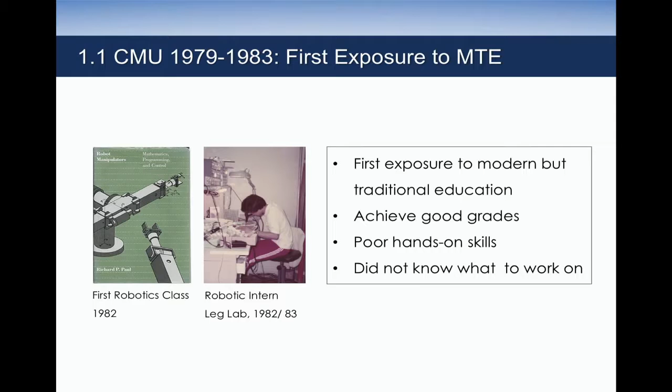Fortunately a year later I spent a summer intern at CMU with Mark Raibert on robots, which gave me a little bit of help. But overall, for my four years, I didn't find a problem that I really wanted to work on. That even dragged me for two years at Berkeley.

I first worked on geometric control with Shankar, and because of a seminar by Isidori and by Wonham, I learned some geometry, but still I didn't really have a feel for the problem. Other people do, but I don't.

Then Shankar wanted to start a robotics program here in Berkeley, so he asked me to help organize a graduate seminar in robotics. I invited a couple of people and got interested in multi-finger hands, because I have a pair of hands so I could see the complex relation of the hands and how to manipulate. Of course, having an experimental setup is very expensive at that time.

I had a fellow graduate student by the name Brad Paden. He said, if you don't have an experimental setup, perhaps you can prove it. So I learned that perhaps there's an alternative approach besides an experimental approach, just like theoretical physics versus experimental physics. So then I jumped into it, tried to learn the tool, and thanks to the richness of resources from Berkeley, outside the EECS department, there were so many additional tools available.

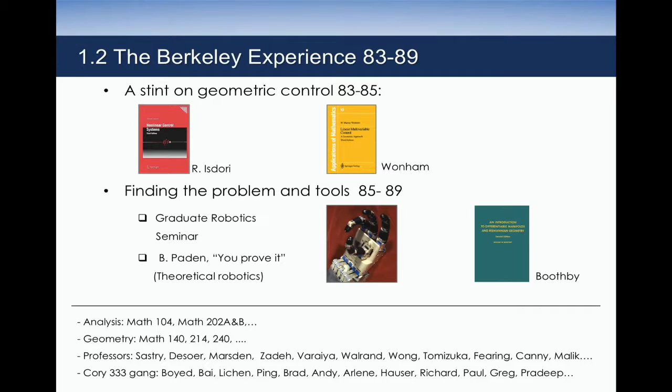I took lots of math courses. Those are probably students there - they will still recognize those numbers, right? And they also have wonderful graduate students there, and also wonderful professors. You can walk into their door and ask questions anytime, right? So I truly benefited from interactions with fellow students and with professors there.

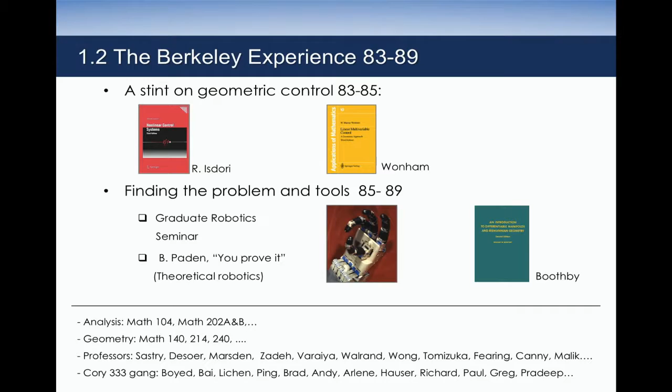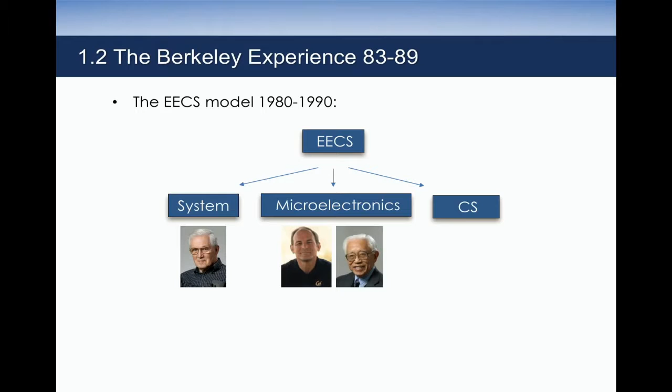I still remember, that was probably when Jing was the department head, right? That department was organized into three major parts. I remember CS, but the CS was still a small portion. The majority was systems and microelectronics, and those are professors that I know.

And of course systems and CS had a tremendous impact academically. But around that time it was really the age of microelectronics - they impacted both academia and industry. Also, lots of my fellow students from microelectronics, after their PhD, went on to found their own ventures - business that I call PhD-driven startups.

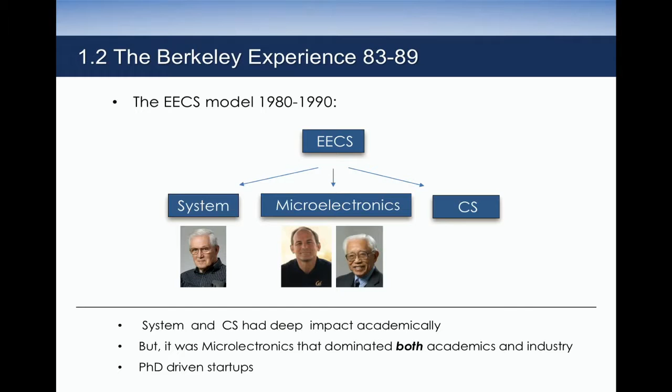I had a 2 to 3 year short stay at MIT Leg Lab, and Mark Raibert was my advisor, both at CMU and later at MIT. After many years of being a professor at MIT, he quit, and they founded Boston Dynamics.

And I asked him why, and he said as an engineer you really need to push from basic research, to applied research, to business - even though to this day he still did not sell a single robot. I talked to him, but he had no regret that he took it on, and the company we all know was bought by Google, and Google probably wants to get rid of him.

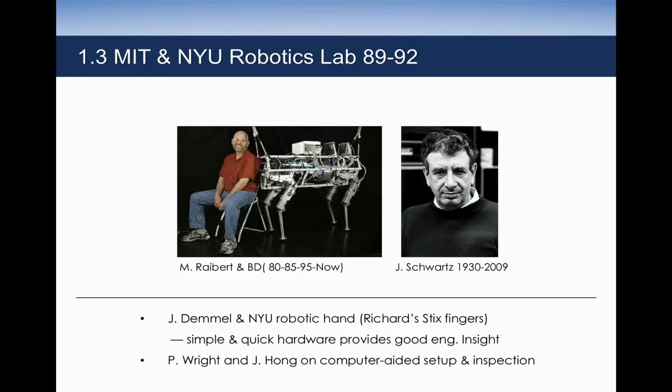And then of course Jack Schwartz used to be a mathematician, and I know from his heart he wants to do something real, so he established the robotics lab. I also had interactions with James Demmel, who went back to Berkeley, and also Paul Wright, and learned a few real problems on computer-aided inspection and also manufacturing.

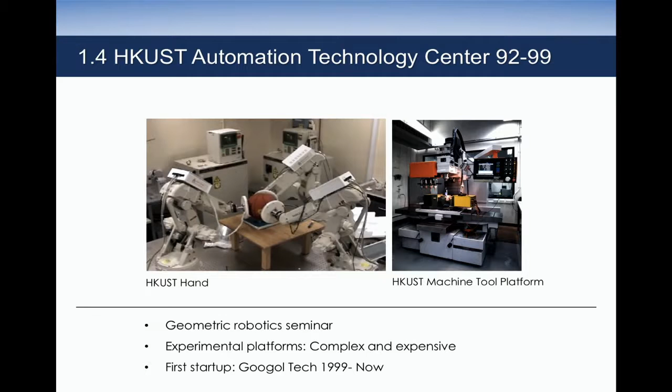For my later PhD students, I immediately asked them: you have to learn the math and also do the experiments, and use both approaches to try to solve the problem. After a couple of years, I believe I came to know how research and experiments work, until I finally utilized the controller I built for the hand for my first startup. So that is really the first part of my story.

So the second part - I thought I still want to recall a few of the important elements that I learned in Berkeley that benefited many of the things I do for a long time. That is geometric robotics.

I know that here the robotics program is getting much bigger and much more interesting, but I think the tools are still probably more or less important. For us, and for people from Berkeley, we benefit from the rich mathematical environment and theoretical approach. We use not just the traditional mathematical tools, the Euclidean geometry, right?

Those are the people who contribute to the development of these tools. Today we know if we have a space modeled by Euclidean space, then you can use calculus to analyze properties of your system on those spaces, because all engineering problems, through approximation or linearization, eventually become a function on Euclidean space - this we all know so well.

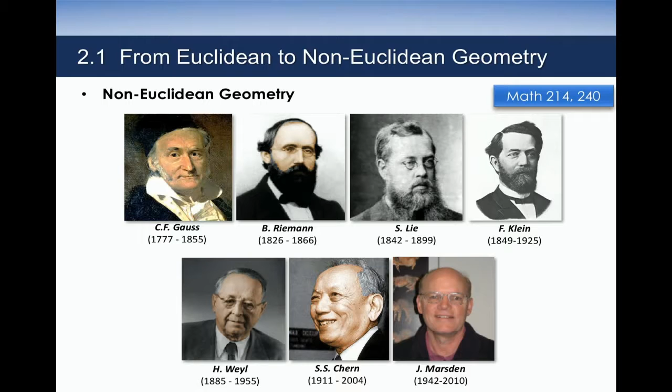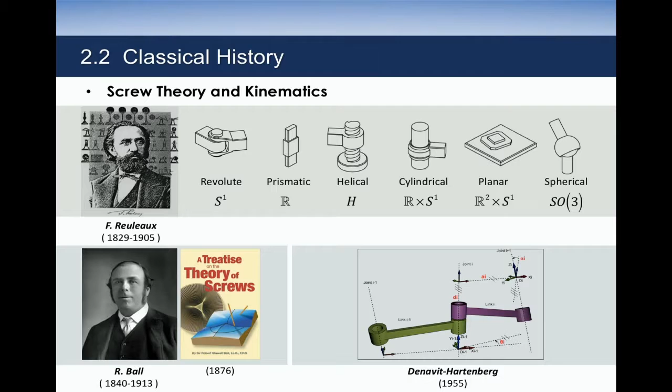And of course, the use of mathematical tools in the old days to analyze the mechanisms, analyze the problems of robotics. If you use the traditional mathematical tool, those are called screw theory, which I call the classical mathematics for robotics, and those are the developers.

For me, I'm so fortunate I was able to learn the modern tools. That was introduced in the early days by Roger Brockett from Harvard. Shankar brought me the PhD thesis by Montana, and also the group from the East Coast and the West Coast not only collaborate but also compete in a very friendly manner.

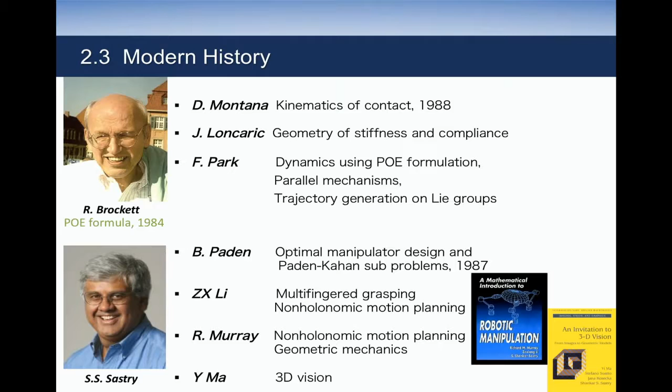Shankar and many of the students applied and developed the tools for robotics, for 3D vision, and for many other interesting things. I believe all those are covered in those courses, if you take EE 125, 192, and also you will see.

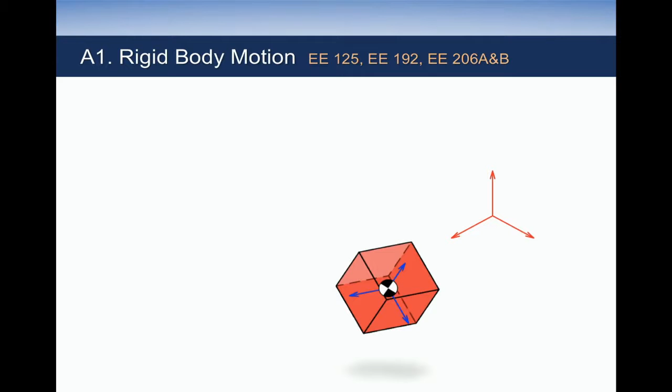It took me a long time to see those problems. I think the problems are really, really important. The tools come next to it, and now you also have AI, machine learning. But I think the problems are still the first order issue. So I'd like to quickly go through some of the problems where those tools are extremely useful.

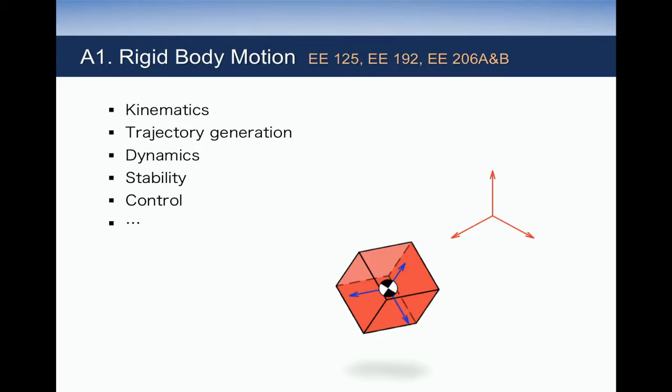For example, how do you describe rigid body motions? Using those mathematical tools, there's kinematics, trajectory. When you take the course, you're going to see those are fundamental for drones, for robots, for mobile robots, and also for interconnected rigid bodies, such as industrial manipulators or manipulators under constraints.

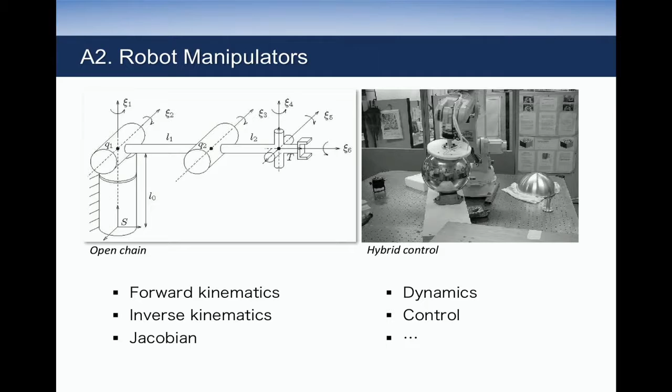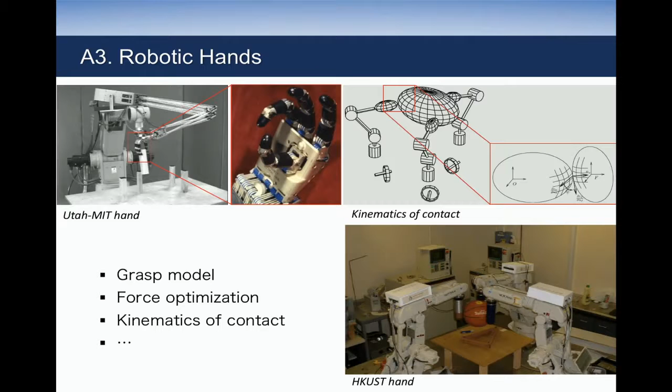You need the right tools to visualize the kinematics, the inverse, the Jacobian, all those. And also for multi-finger hands, which was my favorite subject for many, many years, and all that grasping, force model optimization, contact modeling.

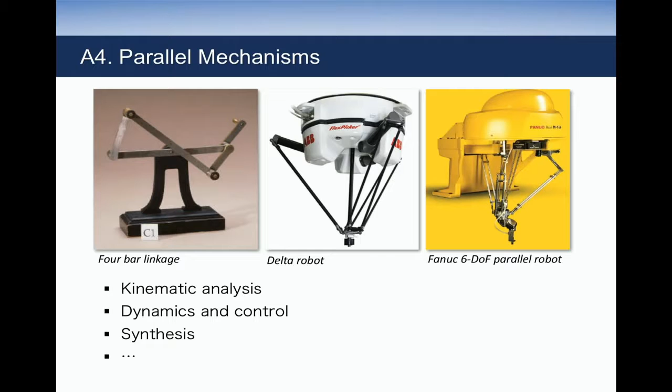And also for parallel mechanisms, manipulators, like all those for high-speed pick and place, and for their variety of problems. And also for lots of...

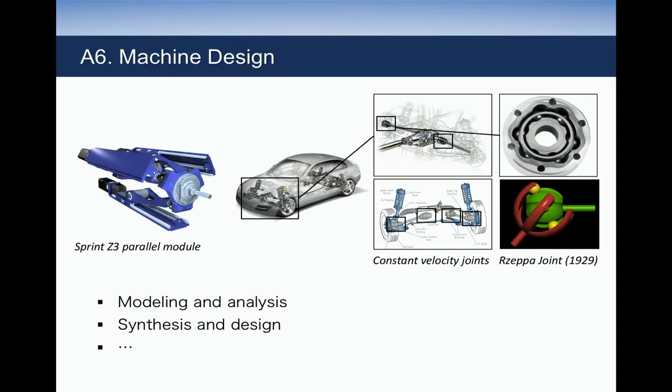Biomechanical systems, like the shoulder joints, the eyeball joints, and all those. How do you model them? How do you analyze them? Planning, control, synthesis. And also for machine design, some critical components, underlying vehicles, 5-axis machines. How do you model those extremely important components?

And also for non-holonomic motion planning. When we worked on this problem, we didn't know today autonomous driving would become such a big popular subject. But around that time, we just wanted to understand a few things: How do you manipulate an egg? How do you understand a falling cat? How do you understand parallel parking? Many, many years later, the theory, the formulation all became real practice.

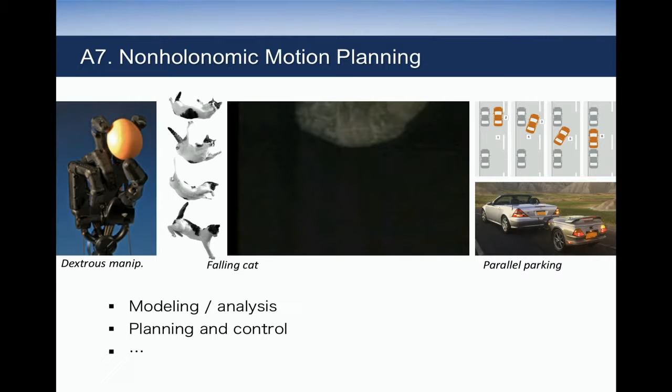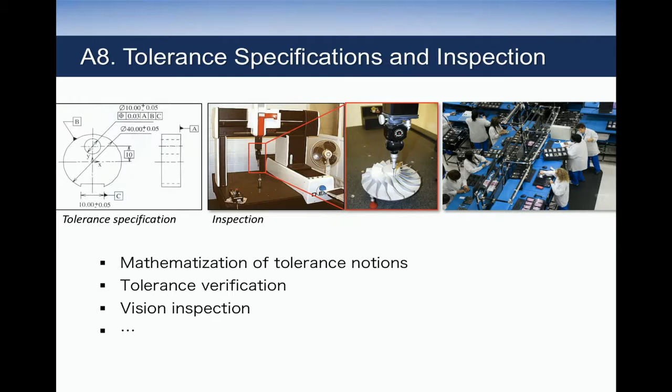And also, for the places I come from, where probably 80% of the world's smartphones are manufactured, for such high precision gadgets, how do you specify the tolerance, control the tolerance, and also do inspection using automated setups. So again, they are in the same setup.

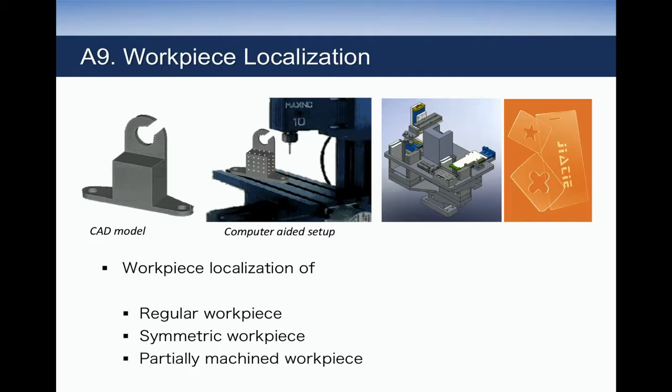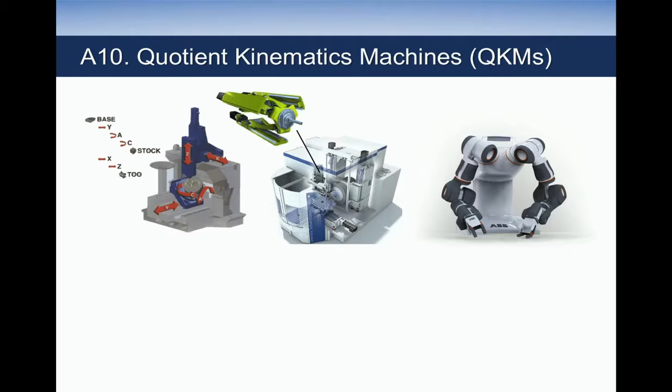And also for workpiece localization to automate industry production lines. Today we call this Industry 4.0. So those are the issues, and also today you need multiple arms to work together. How do you model such kinds of systems? Those are also problems of importance.

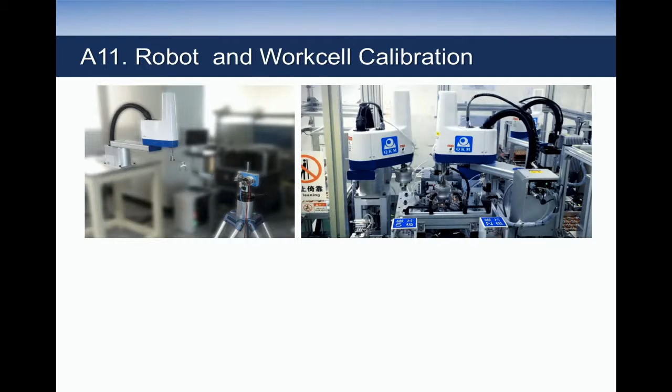And also, like this is a setup where the motors for the drones are assembled. There are lots of calibration issues and also testing issues, and also using 3D sensing and workpiece modeling, offline programming. So I think, some of the students, if you are going to take those robotics or related courses, those are the building blocks for a variety of technology or robotics applications. And if you have those mathematical tools, you will see much more clearly the fundamentals of those problems.

And of course, I then move on to the next part. In Hong Kong, when I joined the university, it used to be labor-based manufacturing. There was no need for automation or robotics. So how do we move out from the laboratory to build a new industry, because we cannot wait for something to happen?

I think the best thing is to create this industry. One of the motion controller cards that we built was accidentally utilized to save a production line in China. From that experience, we tried to ask a question: how do we use the technology to benefit the ordinary manufacturers? The best way is to start up a company.

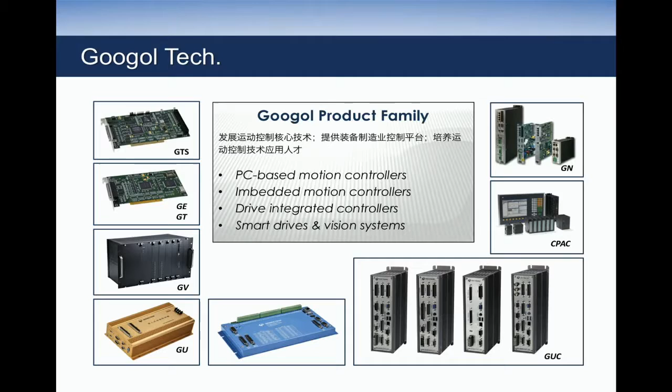Today, of course, Googol Tech is the largest motion control company in China, and we helped build a manufacturing equipment and machinery industry in Shenzhen and across China. Those are some of the products that we manufacture, and it's being utilized in more than 60 different sectors, and especially as the country moves to Industry 4.0, this provides the foundation for it.

Through this example, I learned a lot - not just how to run a business, but how do we prepare our students so they become very competitive in this innovative process. So I was fortunate to teach a course, a robot design course.

This course takes place over a period of 8 months, and the students are grouped together from different disciplines - mechanical, electrical, computer science, or even math department. They work intensively together to design, build, and iterate fast on several robots to engage in a competition. So they learn all the things that a system designer needs: project management, time management, system, hardware, software, electronic design.

Also, in order to speed up the process, I bring the students to Shenzhen, where they can buy the components, make the PCB, do the metal machining much faster than if they do it at the university - 5 or 10 times faster. This way allows them not just to win the competition, but also to understand the manufacturing ecosystem in Shenzhen.

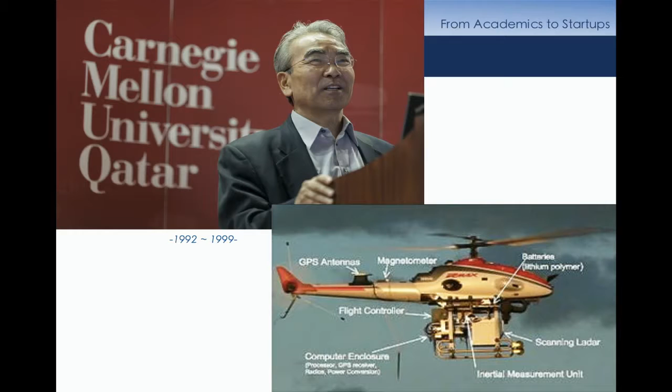Because I knew the people who were able to do this - Takeo Kanade from CMU, my professor at Berkeley, and Vijay Kumar from UPenn - they have big labs to do this. And I said, you have only 3,000 Hong Kong dollars, that's only 500 US dollars. This is not possible. But nevertheless, he kept on doing it.

So after the course, he built a very ugly autopilot for the drones. Then he continued his master's study with me, just to get a little bit of stipend so he could continue his effort. He set up a company called DJI, hoping to sell a few autopilots to the hobbyists out there. Then the quadcopter arrived, so he switched to quadcopter, and eventually the Phantom that you see over there.

And there was a little story behind the Phantom, okay? Because we found out lots of the autopilots were used by DIY people who use a GoPro camera and the DJI autopilot to do aerial photography. So then we went to Silicon Valley to talk to GoPro, made a proposal to see if we could collaborate with them. And the GoPro founder said, okay, fine, I love your stuff, let's do it.

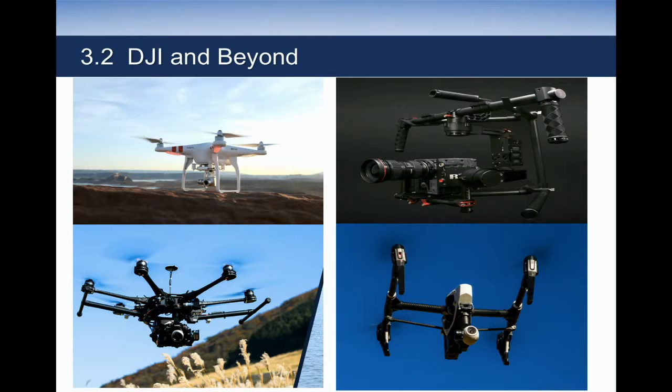So then, are we going to stick with the status quo, or are we going to do something different? I was fortunate to find a Berkeley alumni who happened to have a company providing the chipset to GoPro, but he could only give us a low-quality chipset. So then I got other students together, and they built the camera in 3 months. They learned quickly how to design and build something new. And then the Phantom was the story.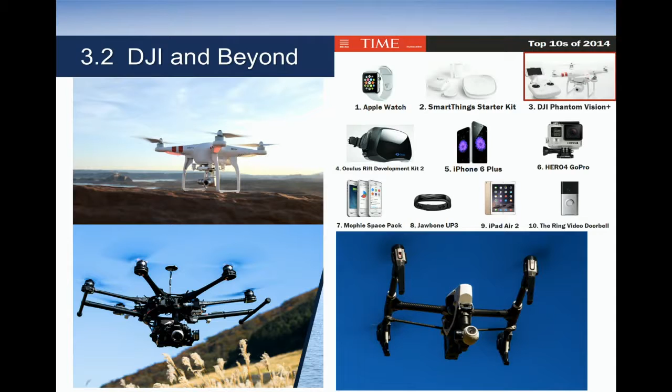So today, DJI is a much bigger operation than GoPro. And also the Phantom received one of the top 3 gadgets of the year by Time Magazine, and the Inspire was number 2, and we beat Apple in both places.

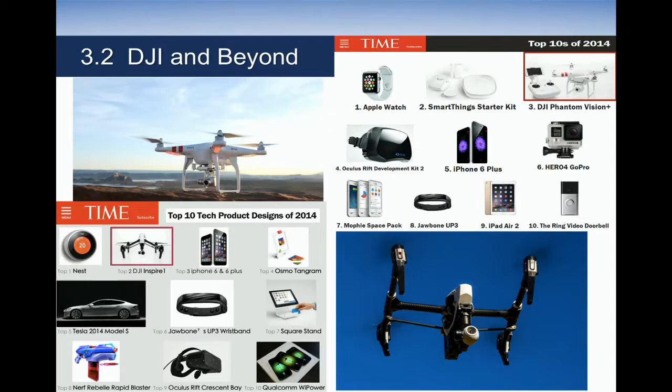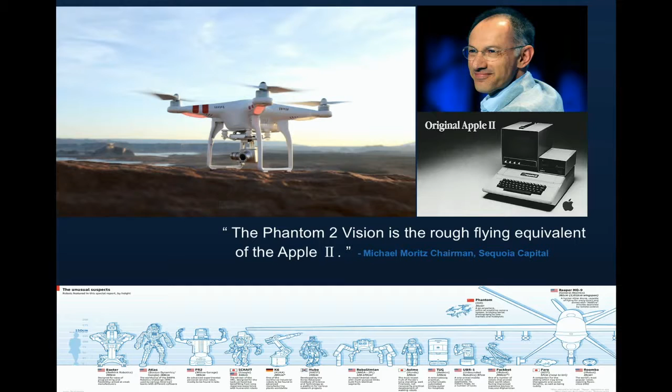So I think that is the story, and it's highly recognized as the first high-tech product from China, which a few years back was only recognized as a copycat. I think it changed the history of the tech industry in China. And Michael Moritz, I'll probably show you a video, not just for taking pictures, but also applications.

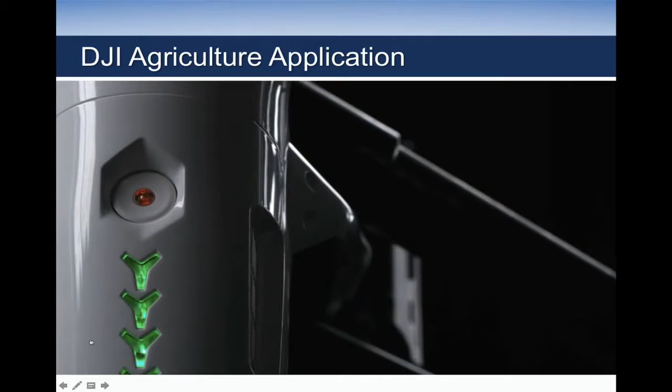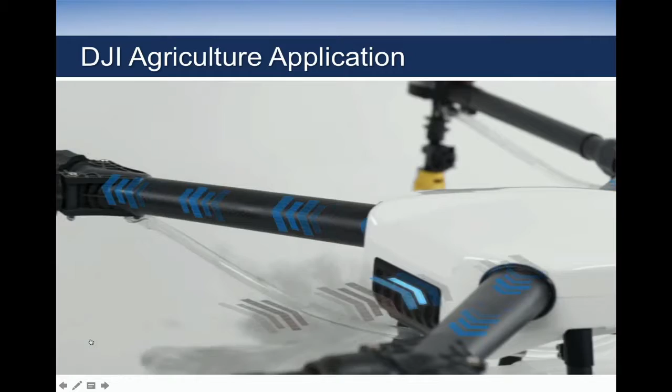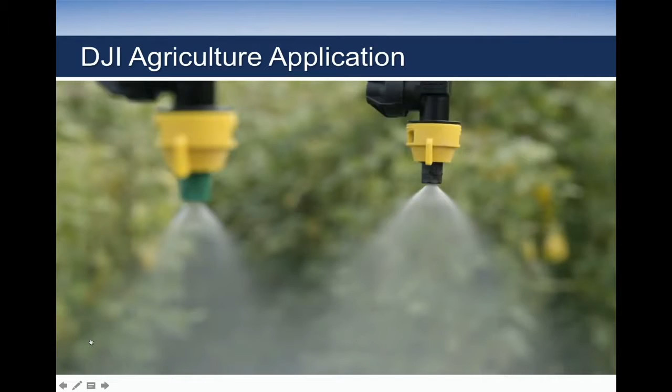When DJI launched the Phantom, we changed the world. With every generation since, we've made flying easier, more reliable, and smarter. Now we are bringing this expertise to the world of agriculture with the DJI Agras MG1, the first agricultural aerial platform designed for ultimate effectiveness, industry-level reliability, and precision spraying. One single Agras MG1 can carry 10 kilograms of fluid and cover 10,000 square meters on a single charge, 40 to 60 times faster than manual spraying. The Agras MG1 is dust-proof and corrosion-proof. It's also water-resistant, so at the end of a spray, it can be rinsed clean. Its extreme reliability is possible through a specially designed internal cooling system. Air enters from the front, and mist, dust, and large particles are filtered out before reaching the motors, where heat is dissipated into the surrounding air. Industry-standard ceramic nozzles come pre-installed and can be swapped out if necessary. Spray quality is further enhanced with a downward-facing radar that keeps the Agras MG1 at exactly the right height above the crops. Using the Agras MG1, modern farms can spray faster, more accurately, and more efficiently, bringing the DJI-powered aerial revolution to agriculture. With the Agras MG1, we are building the world of tomorrow.

So the picture that you saw - in the old ways, each year in China about 20,000 farmers died from poisoning. Now with the drones, you no longer have that problem, and the efficiency improved by more than 100 times. So DJI set up an example, and the first impact was in my own lab.

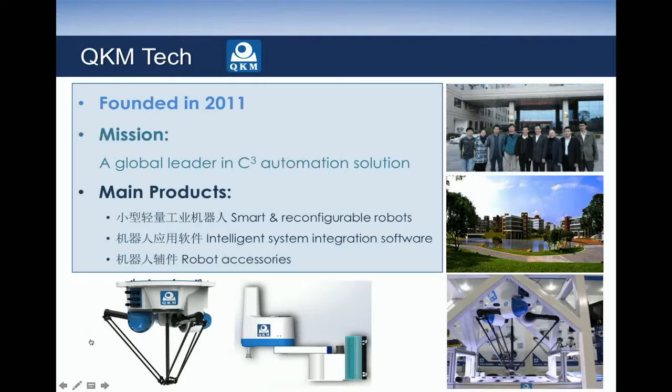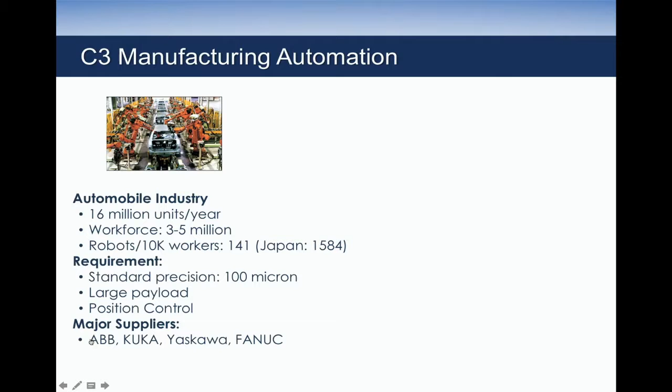And now my students all group together, try to find a problem, and then work on it. So the second project was a group of students who wanted to design and build industry robots. Of course, it took us a few years to understand the right market, the right product, because before we started, there were already big players in the industry, like ABB, Kuka, Yaskawa, Fanuc. And how can a 3 or 5 student team get into this industry and compete with such bigger players?

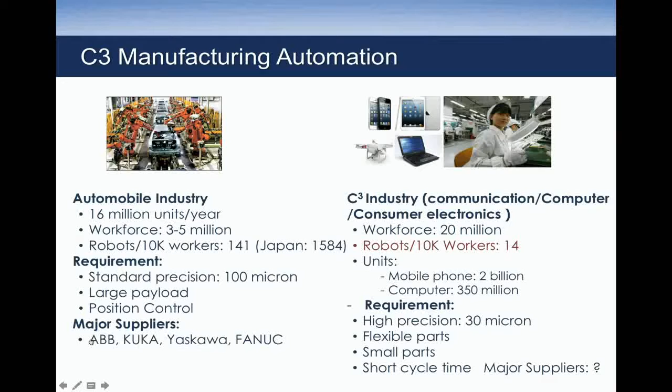So then we saw another industry, which is called C3, manufacturer of your smartphone, computers, and consumer products. This industry is 4 times bigger than the automotive industry, and there are no industry robots capable of solving the problem, the precision and all those. And Foxconn employs more than 1 million workers to assemble and test the handsets. So we are hoping to revolutionize this industry using a new generation of robots.

And this is another project team, following the same path: 3-4 students together, taking the competition project, and then a final year project - they decided to build electrical outboards for surface vehicles.

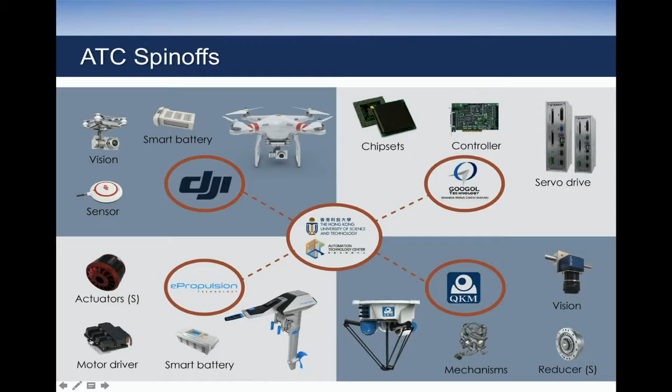Okay, and after a number of trials, they finally get a product that matches the market requirement, and it is on the way to open up. So those are the experiences that I had with some of my students and also postdocs.

And we were fortunate enough to be next to Shenzhen and Dongguan, which has a nickname being the Hollywood of makers, in the sense that you get all the suppliers of components, all the contract manufacturers, big and small. So you can do the design, prototyping, and scale up just next door, at a speed that is probably 5 to 10 times faster than doing it here. So that is important.

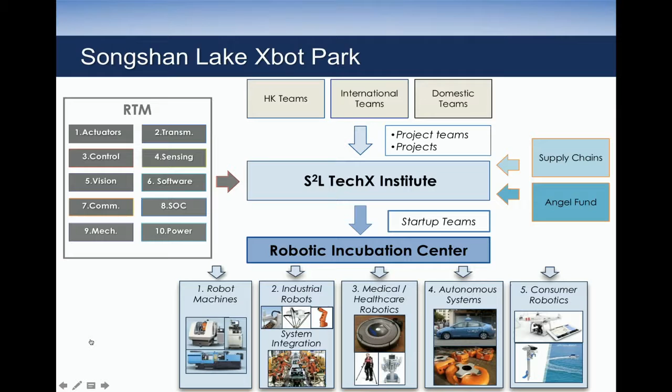And also we learned that this kind of resource, the experience that we went through, could be beneficial to other students, not just from Hong Kong, from China, from the US, and also elsewhere. So we decided to set up a robotic incubation facility in the heart of this region. Any student teams interested in pursuing their idea further can come to us. We provide them some of the components, the supply chain, and also the needed funding so that they can propagate their ideas to a final product.

Over the last year and a half, we have taken around 25 project teams. Some students come in with no idea what they are going to do, but in a year and a half, you're just so amazed how much they are able to progress, using mentorship support under the facility over there. So those are the different types of startup groups, some 1 person, some 2. In a year and a half, they probably grow to 10, 20, 30 students.

So I think from those lessons, I learned a lot. Now with all the lessons learned, come back to see how do we redesign our curriculum for students. So this is my own challenge.